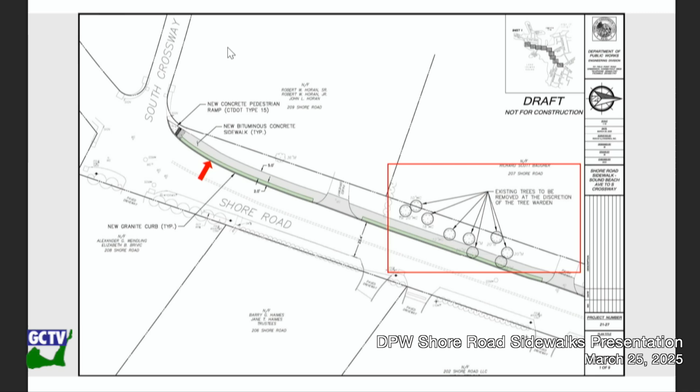I also wanted to mention in the red box, yesterday I had a nice productive conversation and walk through the site with the tree warden, Gregory Kramer, and we went through the project holistically as it pertains to the health of trees. In this location specifically, we noticed that basically all of these trees in front of 207 Shore Road are dead and will be getting removed at the discretion of the tree warden. He felt they were a safety hazard, being very dead. There might be some living in there, but I was told the majority will be coming out prior to the start of construction.

On the next page, I wanted to highlight at the top left circle, there is a hedge here. This would be an obstruction in the right-of-way that we want to work with homeowners to coordinate the best course of action to have this relocated. It is within the town right-of-way, but usually maintained by the private properties, so we try to coordinate with the homeowners to get an agreement that works for everyone. But they will need to be moved should we move forward with this project.

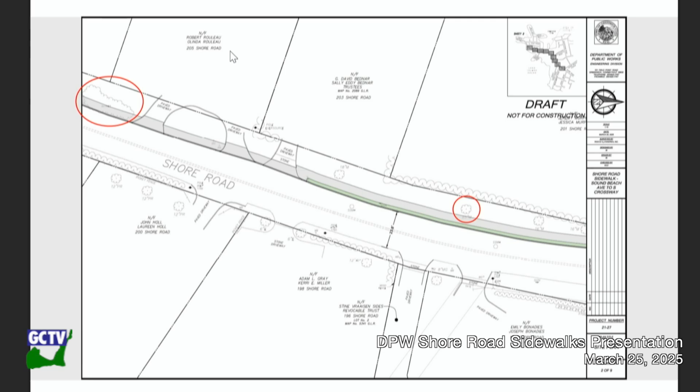I also want to note in the smaller circle on the bottom right, that is a giant tree, a giant silver maple. It's beautiful and very healthy. It's a conversation I had at length with the tree warden. This is in front of 201 Shore Road. If you are driving towards the beach, you can look on the right. It is so big, in fact, that it alters the features of the earth around it. So it's something we definitely want to pay special attention to and want to keep alive, so we're going to do our best to work around it. This is a conversation we had with our tree warden, so he's aware of everything we're doing with this project as well.

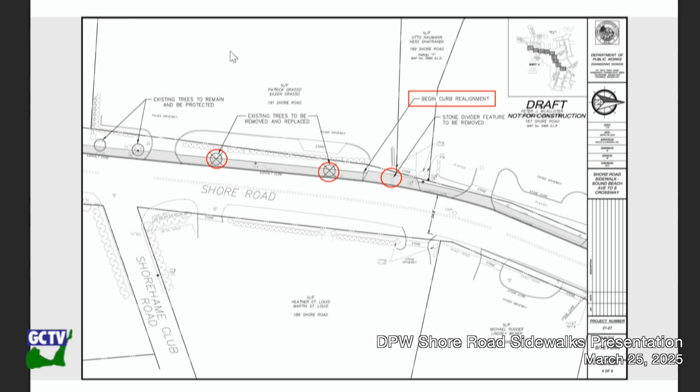So we wanted to work with the homeowner to get their feedback on how they feel about the project and what would make them feel more at ease. I had a productive conversation with the homeowner, and the solution we came up with was a curb adjustment that I mentioned on the previous page. It'll start back here in front of 191 Shore Road and slowly adjust outward to give us enough room to slide a sidewalk in front of the 3 trees and the hedgerow at 185 Shore Road.

In order to accommodate this, we are hoping to expand the road on the other side to maintain the current width. We're trying to maintain the existing edge of roadway as much as possible. We know this affects walkers, drivers, and bicyclists, so we don't want to narrow the road unnecessarily. We want to keep it at least as wide as it is today.

So that's why in a lot of these situations where we are moving the curb out, we also are going to be looking at moving the curb in on the other side, as long as we have the right-of-way available to us.

In front of 183 Shore Road, the curb alignment ends, and that's where it meets with the existing edge of roadway. That's where the new curb will match with the existing edge of roadway.

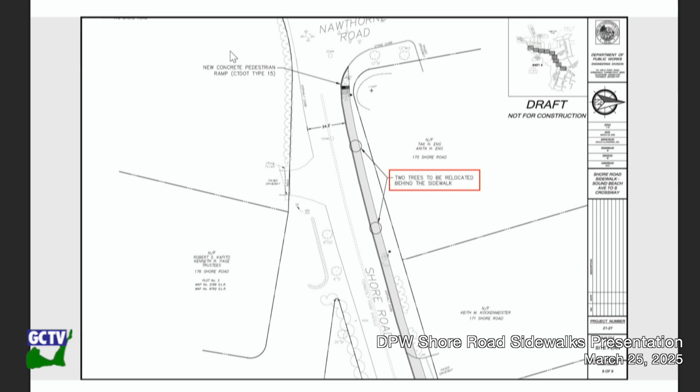This is just south of Nawthorne Road. Not too much to mention here. There are two trees that are actually not marked on the survey. They are two small trees, and in my conversations with the tree warden, I was told that they are young and healthy enough that they can survive being replanted just a couple feet back. Should the project move forward, we'll have to work closely with the Parks Department and the tree warden to ensure the health of these trees following relocation. This is in front of 175 Shore Road.

This is just a drawing panned up at the intersection of Nawthorne Road with Shore Road. I wanted to highlight this area because there will be some changes to the intersection at Nawthorne, and the curb will have to come out into Shore Road just a little bit. The reason we're doing this is to avoid unnecessary easement acquisitions and conflicts with the existing fence, and just to make things easier on our end.

We ran these new turning movements through our traffic software to get a simulation of what passenger vehicles, trucks, and fire trucks will look like when they make a turn like this one, and everything passed. This is something we'll definitely want to take a sharper look at as we move forward towards construction, but everything preliminarily tells us that it works.

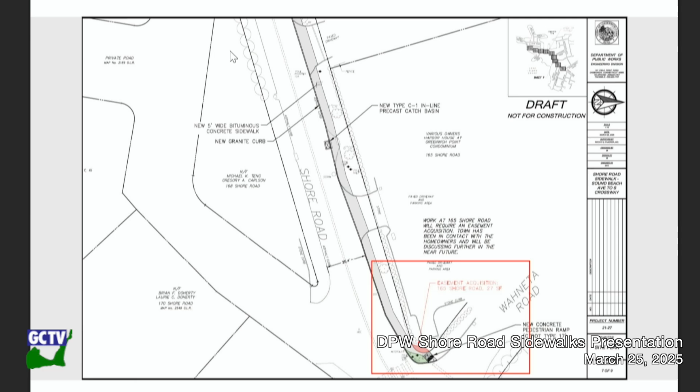This is at 165 Shore Road. This is where our one and only easement acquisition is located, in the box at the corner of the property. In order to accommodate a sidewalk, we will need to route the sidewalk through a small section of private property at the corner of 165 Shore Road. This was done to avoid two utility poles and a fire hydrant located directly at the intersection with Wahneta and Shore Road. The idea is to route it behind the utility poles, but of course that puts us on the private property. This is a conversation we're hoping to have in the near future. I've already made contact with the homeowners at 165 Shore Road, so now we're just trying to nail down a date and time to coordinate and talk about the easement acquisition, and an agreement that works for everyone.

This is right just south of Wahneta, at the corner of 14 Wahneta. In this location, there's a large hedge, and I'm sure it's hard to see - the line work is pretty light, but right where my arrow is in red, there's a large hedge and limited right-of-way. Unfortunately, the hedge encroaches heavily onto town right-of-way, and in order to construct a sidewalk, there's no way around it. This will be a situation where we'll be hoping to coordinate heavily with the homeowner on possible solutions, possible relocations, anything we can do on our end to help make it more digestible for them. But we haven't made contact with the homeowner there yet - we're hoping to in the near future.

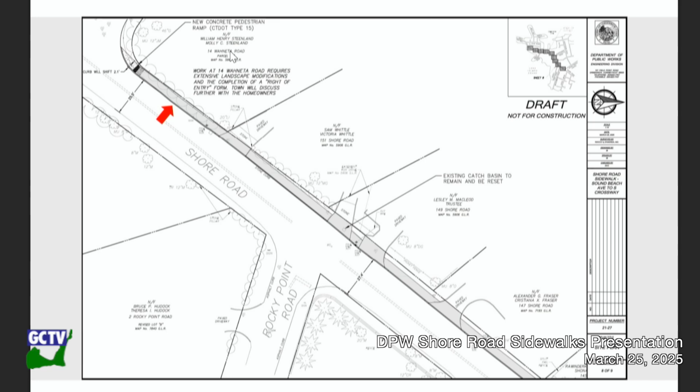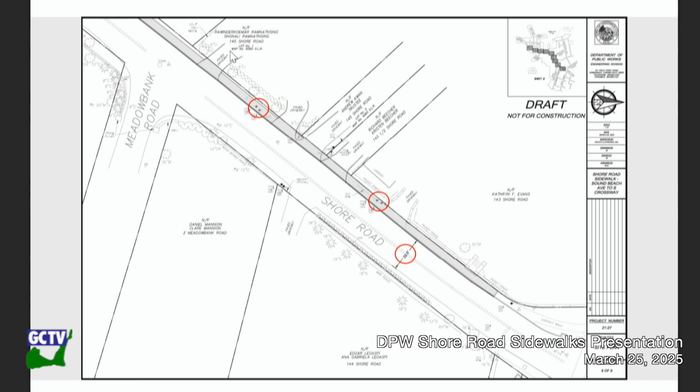Another consideration we're heavily keeping in mind are crosswalks. We know this was something that was heavily requested of us. Of course, you didn't see them in the previous plans I just showed, but I wanted to get through those plans first to show that a sidewalk is feasible. From here on, we can talk about crosswalks and other safety improvements we might want to consider.

So the way I approached these crosswalks is I looked at basically every single intersection and tried to figure out what the best configuration for a crosswalk would look like. Those will be on the screen to my right.

The first is at North Crossway. Just allow me one second. This is at the intersection of North Crossway with Shore Road. In my opinion, it seems feasible enough, but it will depend on outcomes of the conversations we have with the homeowners at 201 Shore Road, located at the top left-hand corner of the screen.

I also wanted to note that generally we don't design for crosswalks like this one, because we don't like to put crosswalks to ramps that lead to nothing. It's impossible to make it ADA ramp compliant if it only leads to dirt, unfortunately, as you can see on the southern side on the 4 East Point Lane side. But it is something we consider if there is a strong appetite for it. We want to make the point that these aren't ADA compliant. They are helpful for safety and visibility purposes, but won't help if you have ADA or disability requirements.

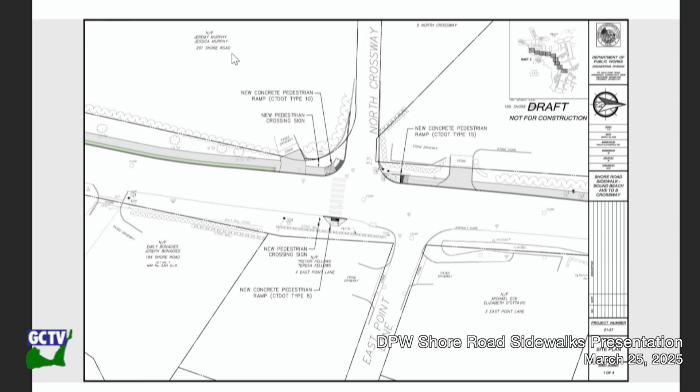Is the crosswalk going across Shore Road, or is it connecting to this sidewalk? It's going across Shore Road. It'll be from North Crossway at the top left-hand corner of the intersection, down here — I'll point it out — right here into this ramp. This is the ramp I was talking about. It's not technically ADA compliant because it doesn't lead to anything, but it does help with things like visibility and accessibility.

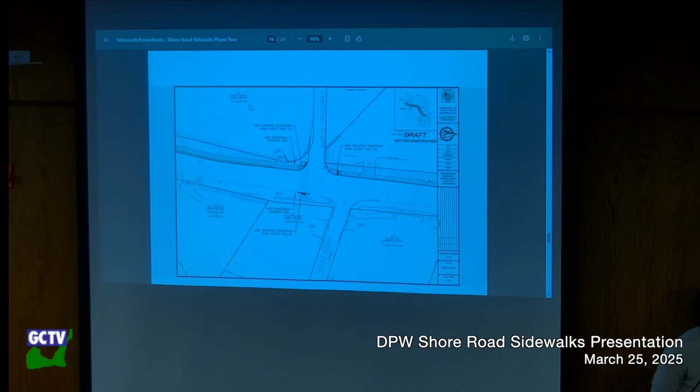Anywhere the proposed sidewalk will traverse a side road, there will be a crosswalk there. That wasn't translated onto the plans yet, but yes, that is the idea.

The next one I wanted to talk about was at the intersection of Shoreham Club Road and Shore Road. I'll point it out again so you can see it — it's this piece right here, across, right in front. This is actually the town pump station. I just took a look at this one for feasibility because it's at another intersection. Not much to say here, really — it seems feasible, and we have the luxury of being in front of the town-owned pump station.

But we will need to coordinate with the homeowner at 6 Shoreham Club Road because — I'll point it out — there's a driveway right here, and we don't want to introduce any sightline visibility issues that aren't there currently. It does seem constructible, but we'll need to put a little more thought into sightline concerns for this one.

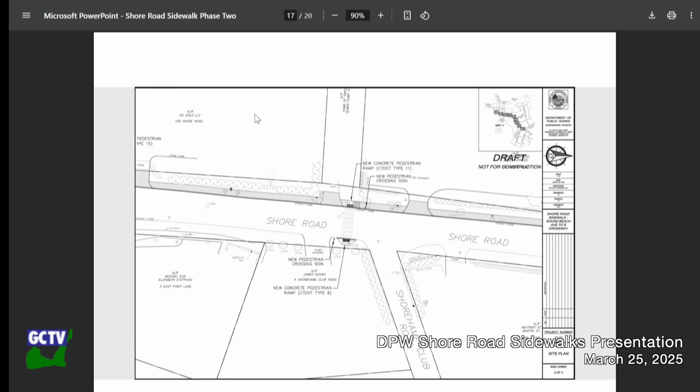Moving on, we have the intersection of Hawthorne Road and Shore Road. Unfortunately, in this situation we're limited — let me back up, this is right in front of 178 Shore Road, there's a large hedge there, I'm sure you are all aware of that one. The presence of the hedge limits the available right-of-way we have for a crosswalk or a pedestrian ramp here, as well as some unique property lines that run very close to the edge of the road.

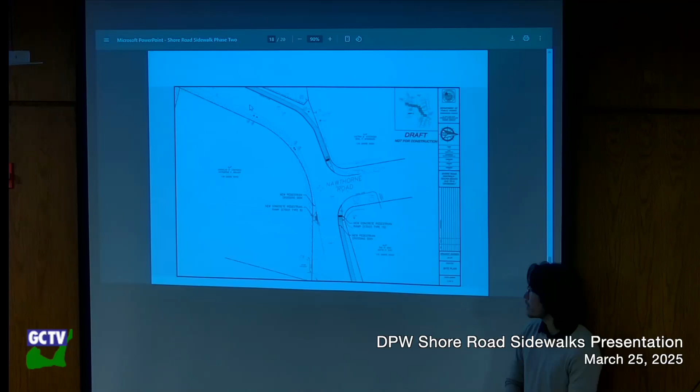So we're limited on that front. I was able to sneak one in more towards the bottom of Hawthorne, right across here, but it wouldn't be my first choice, I suppose. It's like a suicide situation, yeah.

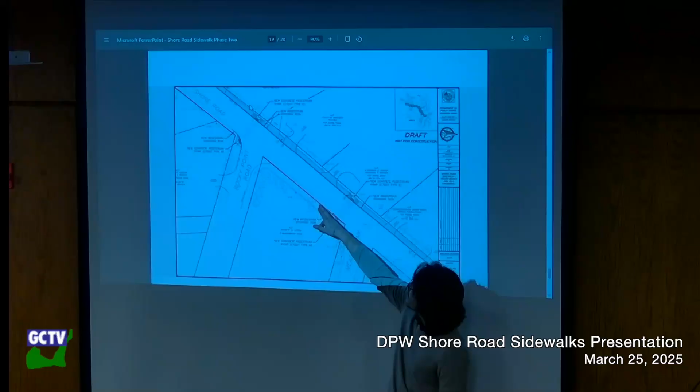Those are the existing property lines, and as you can see, I'll point it out. Property line is in red, and the edge of the road is actually this light gray line right here. So we don't have much room to work.

And if we were to put in a crosswalk at Meadowbank, which I know there is another big push for that one because I believe there is a bus stop there, a school bus stop, but it does encroach upon private property, so we'll need an easement agreement with the homeowner. Not something we can't do, but it is a conflict that we will need to approach.

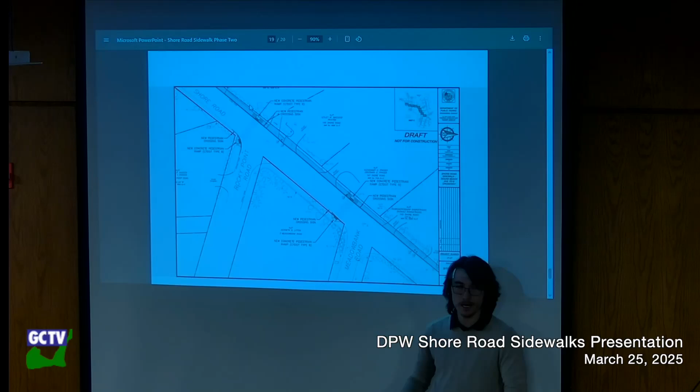And that should about do it. I hope that wasn't too dry for you guys, but I mostly wanted to have this for the question and answer portion. Thank you. Thank you, Ian. Thank you for your presentation and all your hard work on the design of the draft.

I would like to also make a note that we have a request into the BET right now, and there's a public hearing on Thursday for this town project. The funding for the construction of this project is not available until this funding is approved. So if all goes well, then as Ian mentioned, construction would be anticipated late summer, early fall.

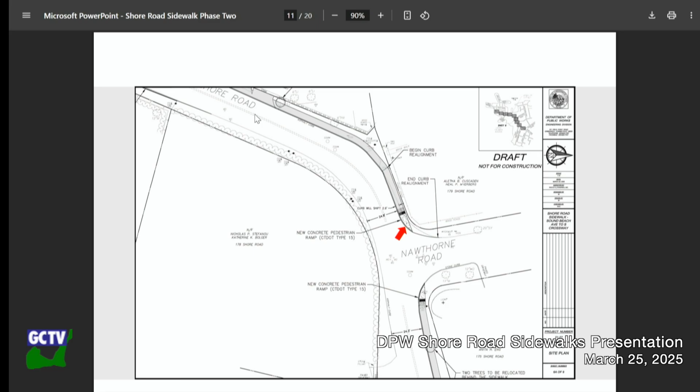And I just feel as if we're going to spend the money to make this safer for pedestrians, it needs to accommodate the safety of bicycles and these other roadway vehicles, strollers that people wind up walking on the road with. And I think it has to be a more comprehensive plan that maybe you need to use eminent domain to make that roadway wider, particularly there.

Thank you, Eileen. Those are all very salient points, and definitely something we'll be keeping in mind as we move forward. Eminent domain is something we try to avoid as much as possible because it is a long, litigious, arduous process, but we will use all of the available resources and tools that we have in order to make the roadway safe. And obviously, all of your input today is very important on that front, because it's not just me working on these plans, it's also hopefully all of you as well.

As I mentioned earlier, we will try to do our best to maintain the existing roadway width. That's why I highlighted Nawthorne as something I want to take a deeper dive into. I ran all the traffic turning movements in our simulation software, but in a situation like this, similar to what we've done at Greenwich Avenue, we do in-person traffic movement studies where we mark out in the roadway exactly where modifications will be made. We block it off with bollards or cones to simulate the new curb line and watch traffic pass through the intersection prior to construction. Perhaps that's a method we can use at this intersection to determine if the changes we're proposing are more viable in a real life sense, because we don't want to rely on the turning movement software all the time. But yes, I'll definitely make a note of that.

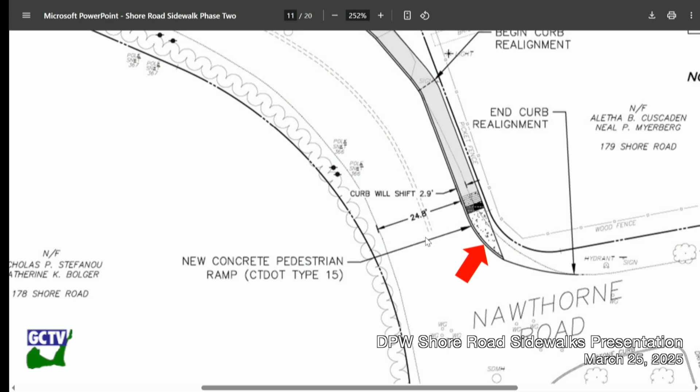Not at the moment, but I can look into something like that. Normally, or at least with this design, I've been trying to keep the roadway width matching existing as much as possible. But even in areas where we've needed to shrink the roadway down, like at Nawthorne here, it's hard to see, maybe I can zoom in, but I included the roadway width here at our most narrow part. It's still 24.8 feet. So you can imagine it would be about 11 and a half foot lanes with a 1 foot double yellow in the middle. It's wider than our standard, but this situation is unique in that it's on a bend with a lot of traffic, and we've gotten complaints about this corner as well. We wanted to make sure we have a little bit extra space. Roadway width is definitely something we want to pay attention to, and I believe throughout the entirety of our project we will have at least 10.5 foot lanes.

Well, I don't know the feasibility of intermittent shoulder striping, but if you can at all, it's a visual that gives awareness. If you can get a white shoulder stripe in there, at least in some portion, that would really help the runners and cyclists on the road. And then the last thing, just to echo, not a repeat, but the speed thing is really important. It's extremely dangerous. I don't know if GPD or the town has data from monitoring speed, what the average speed on a general day or seasonally is.

But just a real short story. Two months ago, I went to Centerport, Long Island, to a birthday party, and I got there real early because I wanted to go explore a beach. I think the name of the beach was Nolan Beach, and I went to the yacht club there, got there early, checked in, I asked the bartender about the beach, and he warned me.